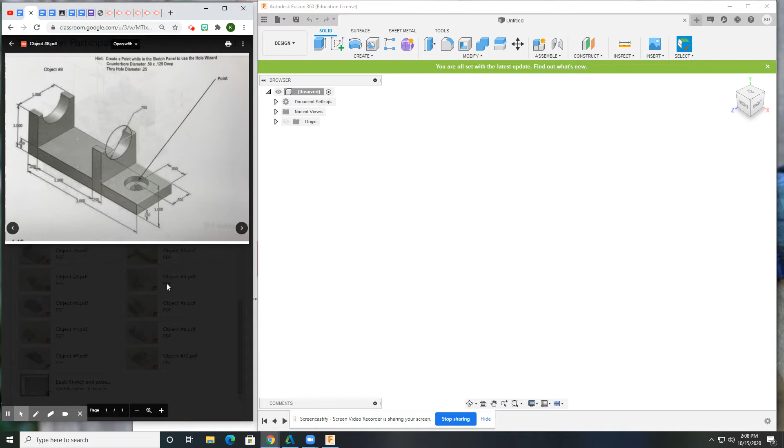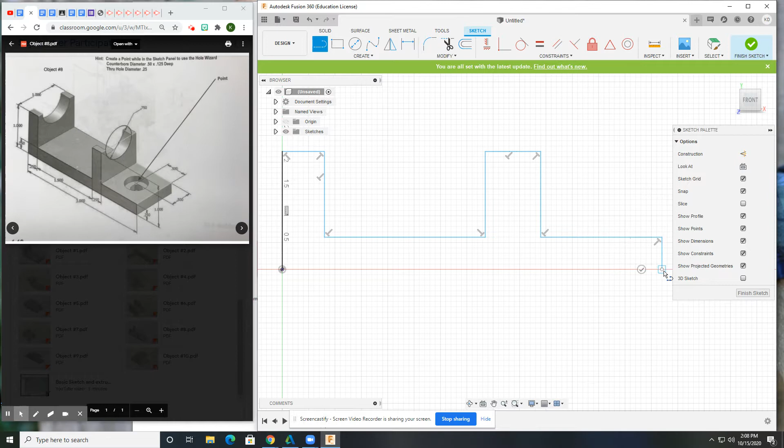So let's go ahead and approach this. I'm going to approach it from this plane. I'm going to put my origin in the back corner and just start sketching perpendiculars. So that's what it looks like to me. All right, looks good. Let's put in dimensions. Okay, now it's a little folded up, so just drag it back where it should be.

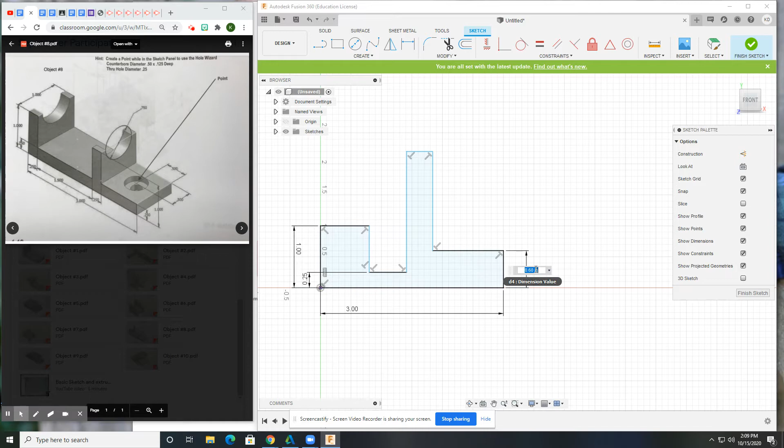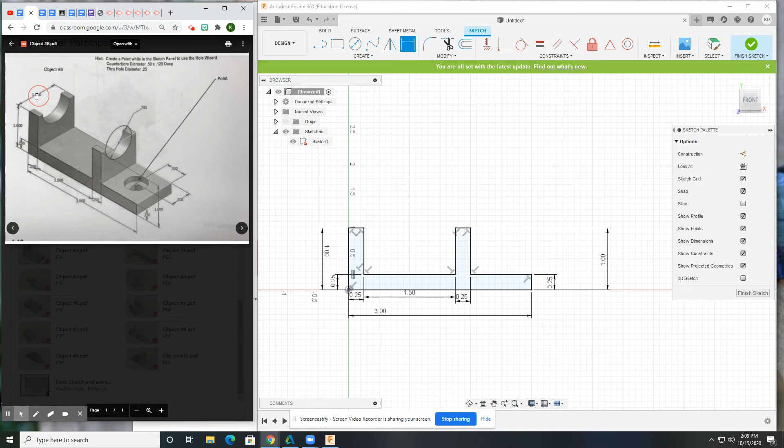Everything is just coming right off the drawing. Just putting it right on. Sketch. There is a 1.5 between these two. Sketch is. That's it. That's all I need. Perfect. Now let's look for depth of extrusion. I see a 1 inch from this corner to this corner. So there we go. Solid extrude. Select profile. Now I'm going to extrude to the back. That's going to be -1. Give me -1 without the decimal.

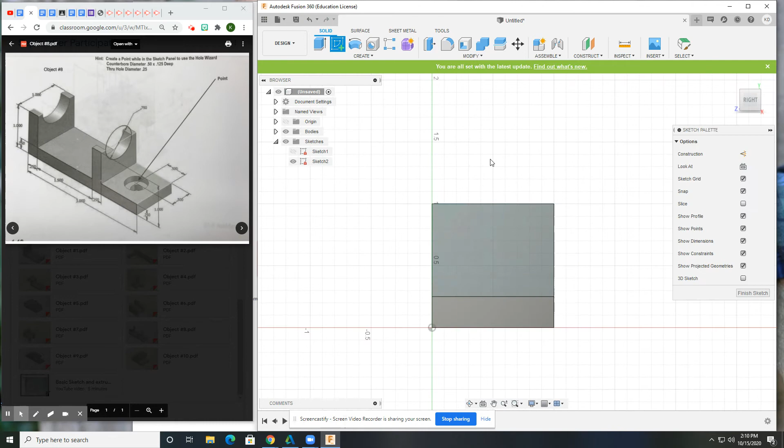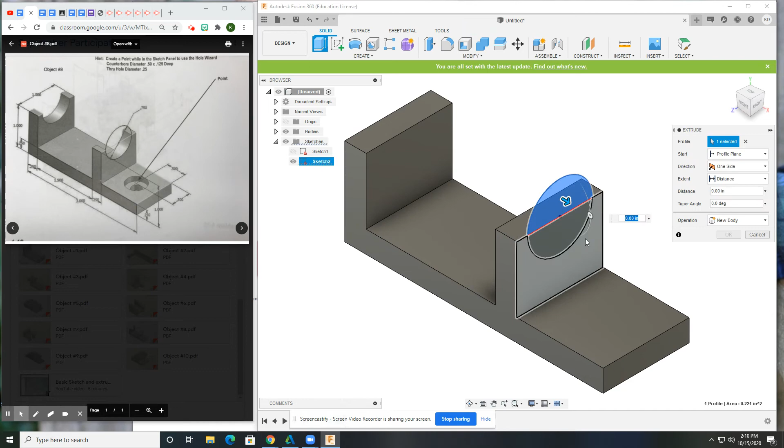Okay. That looks good. Now I need to do a sketch here. And it looks like a big circle. Now there is a line here with the center point on that, which is this line. And it's symmetrical. So use that midpoint and put it right there and put your diameter in, and that should be all you need. Good, fully constrained. Go ahead and let's select that profile, and we're going to do an extrusion, and we're going to do a to object to this back plane because that's where it cuts from, and tell it to cut.

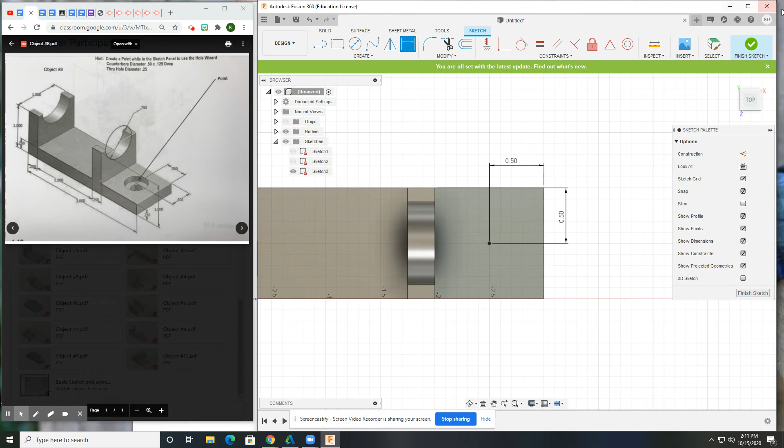Looks good. Now we're going to do another sketch, and I'm going to use the hole wizard or the hole tool here. So what I want to do is use a point. Under the create tab there's a point, and there's going to be a point and dimensions here. This is 0.5. Between here and here is also 0.5. Is that right in the middle? That sketch is fully constrained. Now here's what you do for the hole tool. Exit the sketch, select your hole tool. It's going to ask you what you want to do. Select that point you just made.

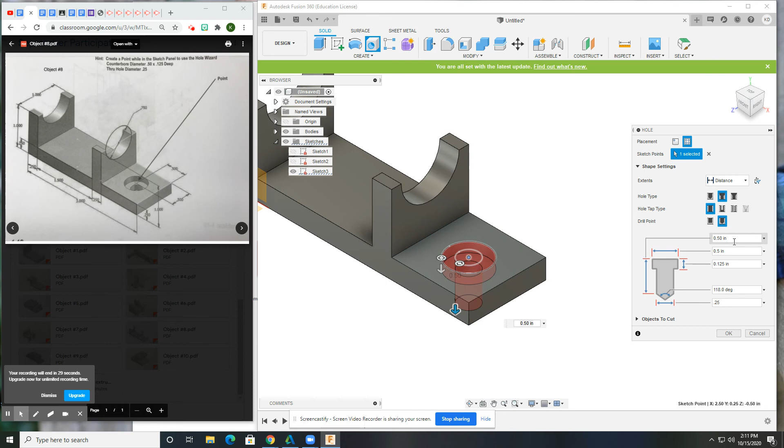And now here's where we have to figure out what we're going to do. For hole type, there's some options, but if you roll over it, it tells you. We're going to do a counterbore, and the diameter of the counterbore is 0.5, and the depth is 0.125. It's going to be a simple hole. We don't have to worry about drill point. The diameter of the hole going through is 0.25, and the hole depth is 0.5, so that actually looks good.

Now bring it back home. You can always grab your inspection tool and double check the diameter here, 0.5. You can check the depth as well, but this is complete. That is a good counterbore. Everything looks good. Collapse your sketches. Go ahead and save it, and you're good to go.